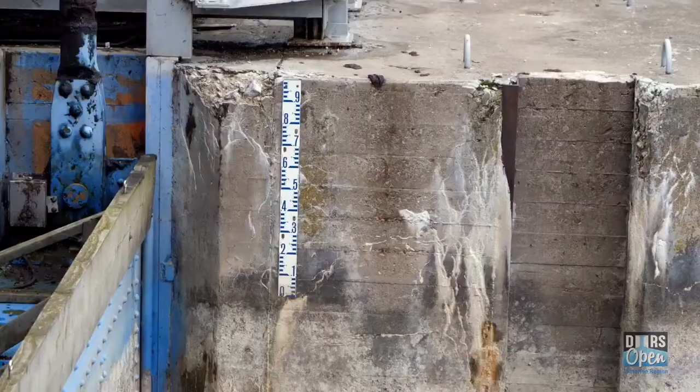This particular dam was the first project of the Grand River Commission. And essentially what a dam does is it holds back water and allows us to release it. So when we have too much water, when we have a flood, or in the spring when we have too much water, the dam can hold that water back. We release some of it in a controlled fashion to try to reduce downstream flooding.

And then over the summer, when it gets really dry like it's been this summer, we can release water to add additional water to the river. Otherwise, the river would be really dry.

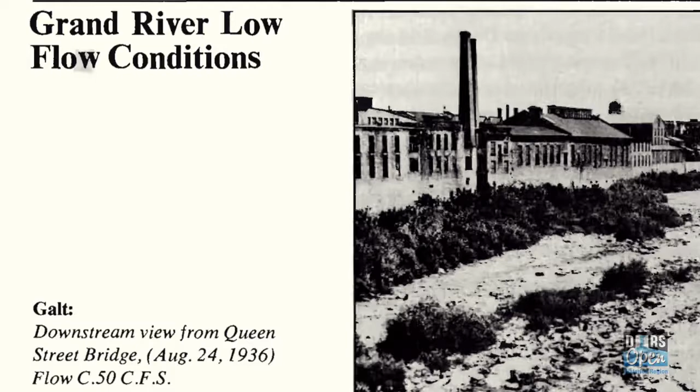The Grand River Conservation Authority really got its start as a result of water problems in Waterloo region, in cities like Cambridge and Kitchener. When the upper portion of the watershed was cleared and converted to agriculture production, a lot of wetlands were drained. It changed the hydrology. And when it changed the hydrology, it started to create floods and droughts. And the water quality got so poor it was making workers sick. That affected industry, it affected the economy.

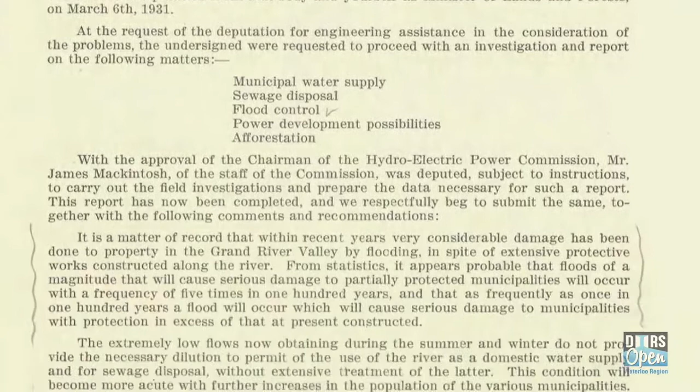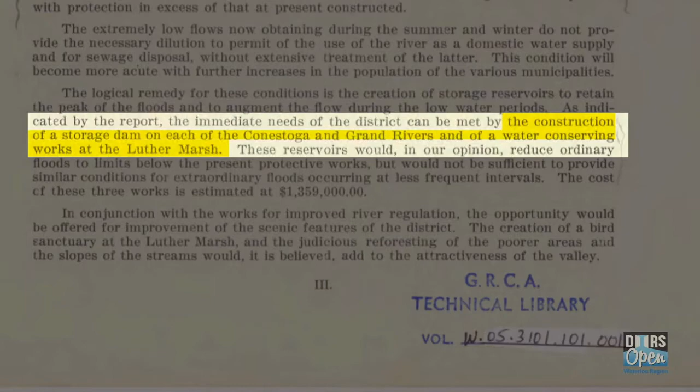The local Economic Board of Trade in Cambridge and Kitchener-Waterloo region went to the provincial government and requested the provincial government commission a study to look into how floods could be reduced and how water quality could be improved. Following that, the Economic Board of Trade recommended that a watershed authority be commissioned or formed to try to solve some of the flooding and water quality problems. And they created what was called the Grand River Commission. The first project of the Grand River Commission is this dam, Shand Dam.

And that's important for water supply, and it's important for helping to dilute treated effluent from the river. Waterloo region has invested a large amount of money in updating the Kitchener-Waterloo sewage treatment plants, and that's improved water quality in the river. The way we see it reflected in the river is not only improved water quality, but a change in species. At one time in downtown Cambridge, people fished carp, now they fish pickerel. That's an incredible change, and the regional tourism around the river has flourished because of the improved water quality.

Waterloo region takes about 25% of their water supply from the river and about 75% from groundwater. Our operating procedure for this dam and downstream is basically to maintain a minimum flow through Waterloo region in the summer of 10 cubic meters per second. 1 cubic meter a second is equivalent to 1,000 liters.

But people have to realize they serve two purposes. They help reduce flooding and they supply water to the river. And those are competing needs, and our reservoir rule curve helps try to find that balance.

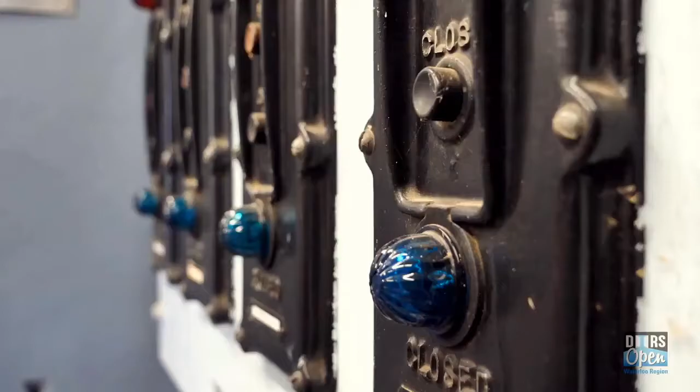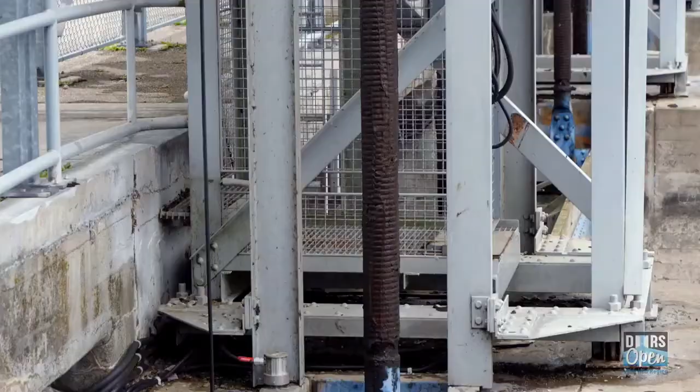So this is electrical equipment that basically provides energy to the gate motors to operate the gates. So on each side of the gate there's large screws, and that's what lifts the gate. So there's a motor up top. It turns gears that basically pull those screws vertically, and that lifts the gate.

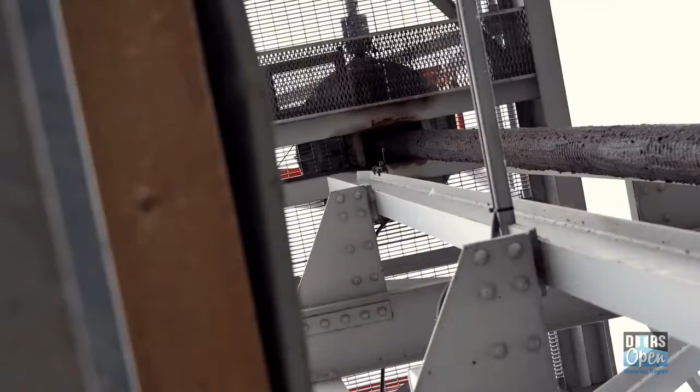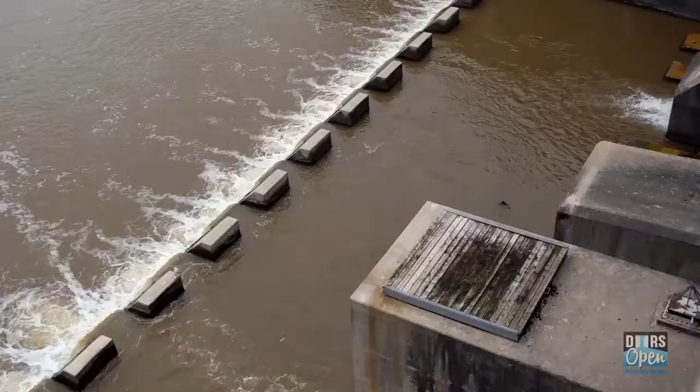So these large blocks and this concrete structure down here is what's called the stilling basin. So when water discharges from the dam, it has a lot of energy. So these blocks tend to slow that water down, and there's a deep pool off the end that allows the water to basically roll but not erode. This is our hydro plant, and we'll be taking you down inside that box structure.

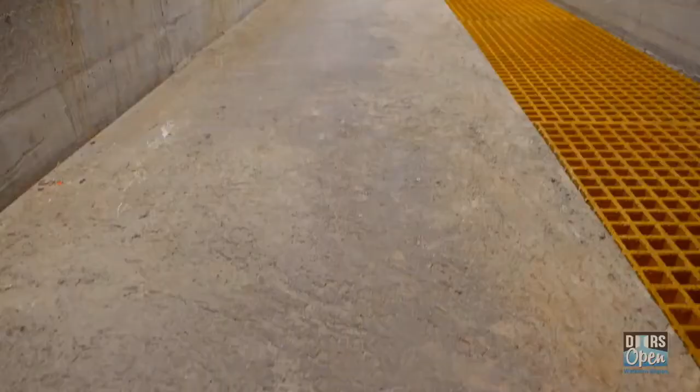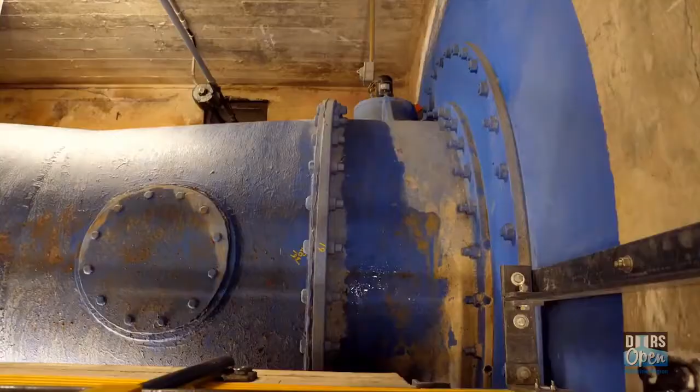So this is one of the 48-inch valves, so it's a low-flow pipe with a big valve on it. You can see the valve operator in the back. And we can actuate the valve or open the valve to let water out through this pipe.

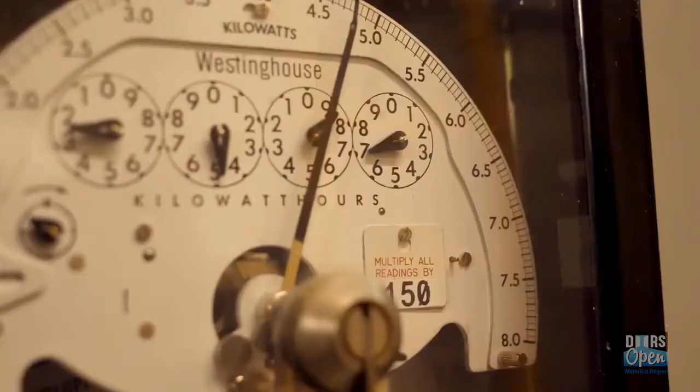We're going to be discharging water anyways, so we put a hydro turbine on it to generate some energy, and it generates some revenue for us. That's the generator. So the turbine turns the generator, that generates electricity and delivers it to the grid. At peak, 690 kilowatts, and that would power several hundred homes.

Do you know the Grand River Conservation Authority manages 27 dams? Important infrastructure is needed for managing our water, and this includes the Grand River that drains into Lake Erie, one of the 5 Great Lakes.

We're now going to join John Johnson, a geologist with the University of Waterloo, to learn all about the Great Lakes. So maybe we can start by first telling us which lakes make up the Great Lakes. There are 5 lakes in the Great Lakes, as shown on this image right here. I've got a few props. This neat shape of Lake Superior, the largest lake, is like this really large container right here. So if we stick this on here, we would put it way up north at the head

of the system. And then we would have 2 other lakes, Lake Michigan and Lake Huron. They go north-south, or Huron's kind of like a hand type shape. And they go below Lake Superior, right here and here. And then we have 2 other lakes. We have Lake Erie and Lake Ontario, which kind of go east-west and are elongated in that way. And they go here and here. So the Great Lakes consist of 5 big lakes: Superior, Huron, Michigan, Erie, and Ontario. Oh, great. Yeah, so now we know which of the lakes make up the 5 Great Lakes.

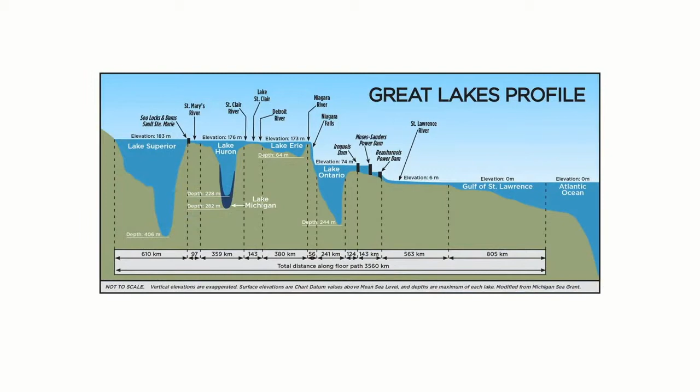So we saw sort of the journey of the water, but how does water make it from Lake Superior to the Atlantic Ocean? Oh, great question. We created another handout for you to follow along in this profile or elevation or stair steps from really high elevation to low elevation. So we're talking Lake Superior is 183 meters above the Atlantic Ocean, which is a relative zero down here. And so if you're up high in Lake Superior, you go through a lock that helps hold up the water or release it and go through the St. Mary's River to Lake Huron.

And Lake Huron and Michigan are drawn as one here. Lake Michigan a little bit deeper and Huron a little shallower, but they're a similar level at 176 meters. So the water level from Superior to Huron and Michigan is 7 meters. In the St. Mary's River, it cascades down to 176 meters. And then the water flows into Lake Erie. And the difference in elevation between Lake Huron and Lake Erie is only 3 meters down the St. Clair and Detroit River. And then from Lake Erie to Lake Ontario, it's a big fall.

Across the Niagara Falls, through the Niagara River, it goes down about 100 meters, down to 74 meters above sea level. And then it takes other steps through a number of locks down to the Atlantic Ocean. So we go from 183 meters all the way down in stair steps, some of which we help to regulate and hold up the water or release the water. Wow, that's a big journey and a big drop from the top of Lake Superior to the Atlantic Ocean.

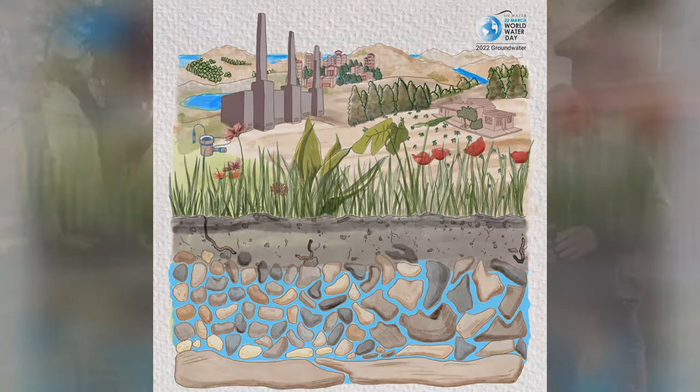It's like when you're at the beach. If you dig a hole beside the shoreline and you start to dig, the hole is empty, has no water in it. But if you dig down deeper, then water comes into it. So the shallow soil, all those sand particles, the spaces are filled with air, and beneath that, they're filled with water.

And a monitoring well is a smaller diameter or smaller width. It's only about 15 millimeters or a centimeter and a half or 2 centimeters in diameter, but we can drill these to all sorts of different depths. The purpose of these wells is to let us measure water levels and collect water samples from different depths. So this next video is a video of Jeremy showing us how we measure water levels in our monitoring wells.

So my name is Jeremy, and today I'm at a quarry. I'm here to conduct some groundwater monitoring, which involves taking water levels and groundwater samples. So beside me here you can see a monitoring well. Now this well is just a white PVC pipe in the ground with a cap on top so that nothing can fall in. This well was constructed before the well regulations were put into place, and so it doesn't have a protective casing around it. Wells that you would see today would need to have a protective casing.

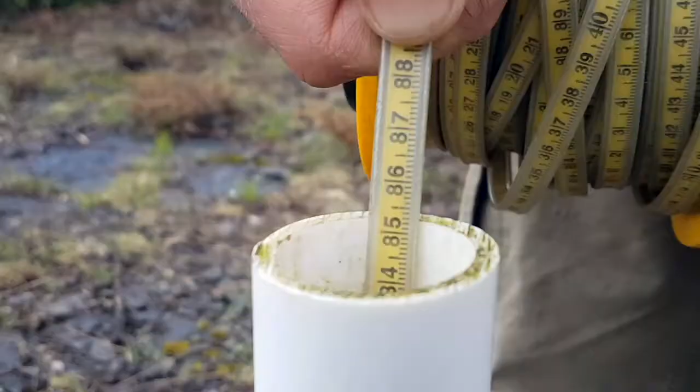So you can see it measures to 88 centimeters on the tape, and now we need to bring the tape up to find the meter mark so we can get an exact value for our water level. So you can see there 3 meters and 88 centimeters, 3.88 meters is our water level in this particular well, and that is measured below the top of the PVC pipe. So always remember to seal the well back up to maintain its integrity, and then record your data in your field book.

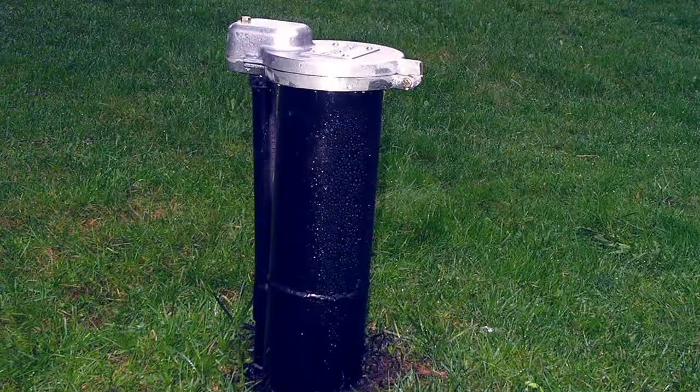So we're here at my farm where I live outside the city, and I have a well. And you can see the well, it has a lid, it has a black steel casing. In this case, this well is about 25 meters deep, and you can see the lid, it's secure so nothing can fall into it. So drilled wells tend to give us better water quality because they're deeper, and the water that we're taking is further away from the ground surface, so we aren't typically going to have some shallow contamination that affects them.

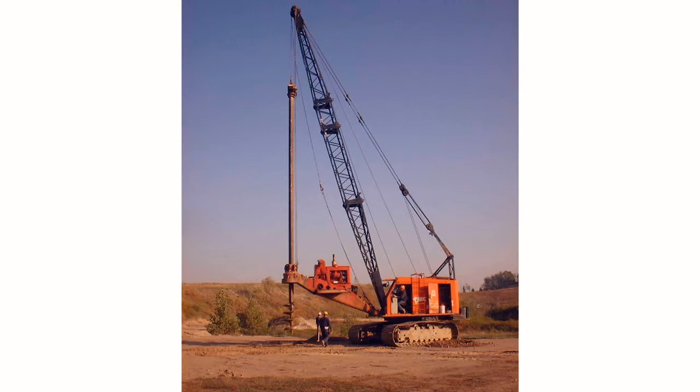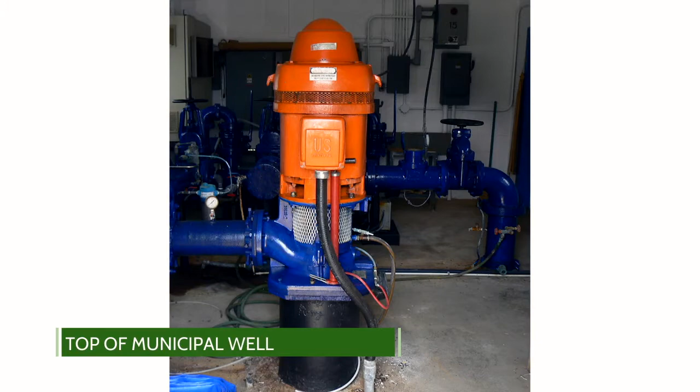So they supply all the water that we need. We have a pump in the bottom of the well that pumps water into the house. Some of our communities rely on drilled wells, like the city of Guelph and the region of Waterloo, and in this case these wells are a larger diameter and deeper than my well, and they produce much higher quantities of water. So while my well might provide 20 liters a minute, these municipal wells can provide 2,000 liters per minute.

So groundwater is something we have to protect. Wells are one of the ways that we take groundwater out of the ground, but they're something that we have to maintain and keep safe so that our water quality is good for us to drink and that we don't take too much water out of the ground.

Thanks for joining me. Now that we all know what groundwater is and how it moves down into the ground, let's explore how it moves through different earth materials. Years ago, all of Waterloo was buried underneath a huge glacier that was hundreds or even thousands of meters deep. It was roughly equivalent to 4 CN towers tall. That is a lot of ice.

Now, these glaciers were dirty. They were full of sand, gravel, and other stuff. And about 12,000 years ago, that ice melted, and as it did, the stuff trapped in the ice, remember the sand, the gravel, and the clay, was all sorted into layers, hundreds of meters thick. This model is very similar to what is below our feet in Waterloo region.

So, here are some of the wells. Here's the river. This would be like the Grand River. Here's the lake. This might be like the lake in Victoria Park. And this is the stuff underground. These are artificial structures that we put there. Now there are several layers in this model. At the surface, this green stuff is meant to represent vegetation. So that would be the plants and the grass, the trees.

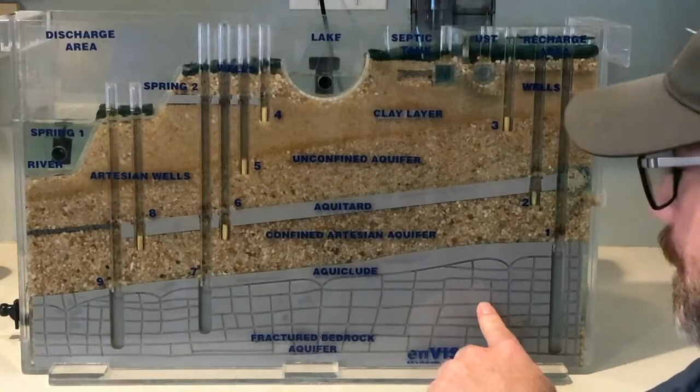And below that layer, there's some coarse gravel, and then some fine sand, and then some coarse sand, and wedged in there are some clay layers. If we were to follow well 1 all the way down, you'd notice that it runs into something, and this is meant to represent the bedrock. In Waterloo Region, the bedrock is dolostone and limestone, and it's highly fractured, and these lines represent those fractures.

In some places, like Elora Gorge, the bedrock is near the surface, and you might see this if you went for a walk in that area. But in other places, it is hundreds of meters underground. This is a core of the bedrock from Waterloo, and you can see here that there are fractures, and in these fractures, this is where the water is held and where it would flow. This is what makes it an aquifer.

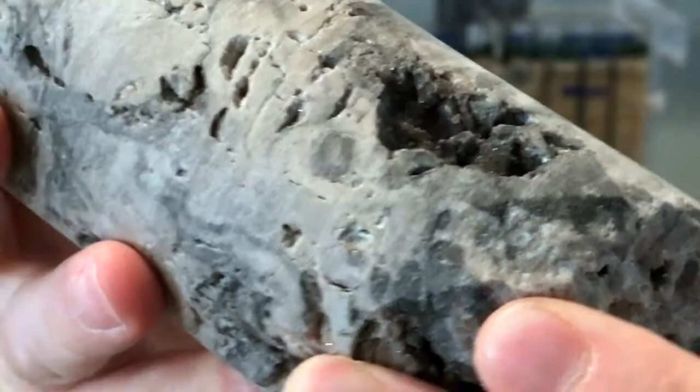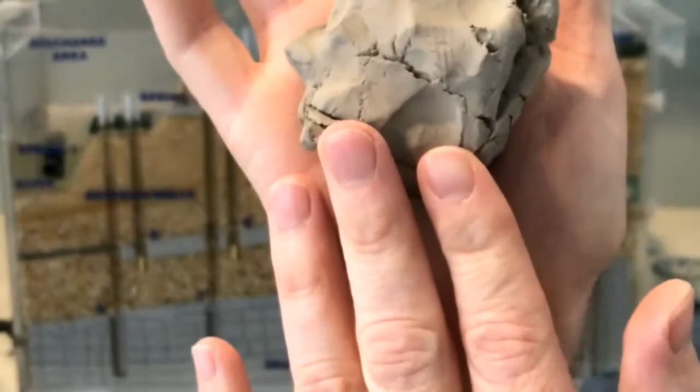Of course, sand and gravel also hold water and allow it to flow, so these are also aquifers. Some material, like clay, is exceptionally slow at letting water flow through it, and so we would call that an aquitard. It's slowing the flow of water. All right, so now we get to do the fun part. We're going to show you how water flows through this system, and to do that we're going to use dye.

I'm going to invite my assistant over, and she's going to actually apply the dye. So everybody, this is Alba, and we're going to give her the syringe. Here's our blue dye, and you're actually going to squeeze it and suck some blue dye in, and she's going to add a little bit to each one of the wells, these first ones here. Go for it. Yeah.

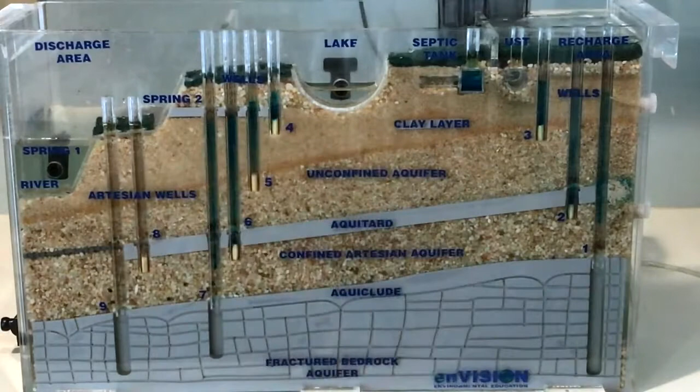The height of the water underground is what we call the water table. So in here, you can see, because Alba's added blue dye to all these different wells, we can now see where the water table is. I'm going to use this red pen, and I'm going to connect the river to the depth of the well, the water in the wells, to the lake, and we'll see visually where the water table exists.

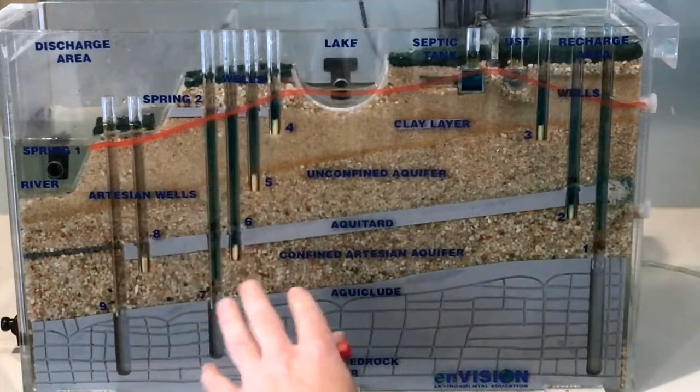And what you notice is that it's not a flat line, that it follows topography to some extent. The depth of water underground changes depending on where you are. That's pretty important if you're a farmer or if you live in the country and you need to get your water from underground. You want to know how deep the water is, so you know how deep you're going to drill. The height of the water underground also changes with time and with precipitation. And at the top here we've got a pump that's pushing water through our system, and it's over here on the right in our area of recharge.

This is where the water, when it's raining or when the snow melts, water enters the ground. So right now it's raining. If I move the pump over, it stopped raining. And you should see in a second, the blue is going to start dropping in each one of these wells. So as the rain decreases, the amount of water entering the system decreases, and the amount of water underground decreases. So here you can see it's well below that red line. And it's going to keep dropping the longer we leave it off.

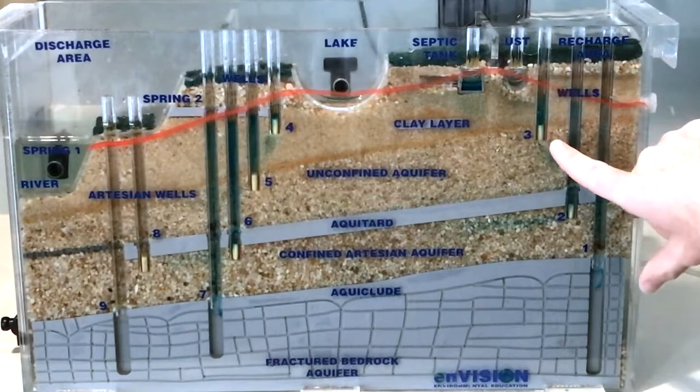Of course, it'll eventually rain again, so let's bring this back. And wow, look how fast that is. There's a good rain event, a nice thunderstorm. The ground is going to quickly recharge. One of the other things that I thought we should explore with this model is how the water enters the system over here, but it exits over here in the river. So this water is flowing from one side to the other.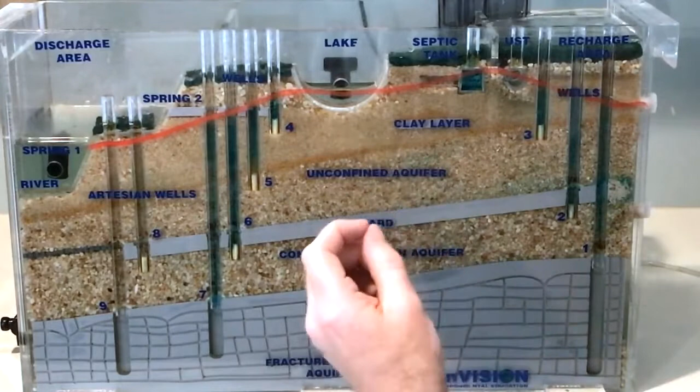Now, we've got several different layers, several different aquifers. The water is going to flow through them at different speeds because of the pore spaces, because of the size of the material. So the gravel, it's a pretty big material, and that means the spaces between those materials are quite large as well. So in theory, if the spaces are larger, the water is going to flow faster through that. Up here in the sand layer, the particles are smaller, so there's smaller spaces between the particles. That means water can't flow quite as fast through it.

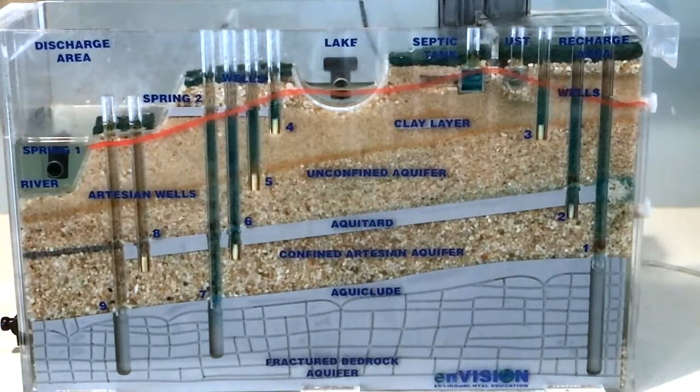So if I was to guess which of these 4 layers the water is going to flow the fastest, I would guess that the fractured bedrock is going to be the fastest because the pore spaces are the largest. And this fine sand layer at the top is going to be the slowest because the particles are so much smaller. There are other layers like this clay layer. They're going to act in a different way, but we'll come back to that in a minute. So I'm going to add a little bit more dye, and then we're going to flush it. We're going to see which one flows the fastest.

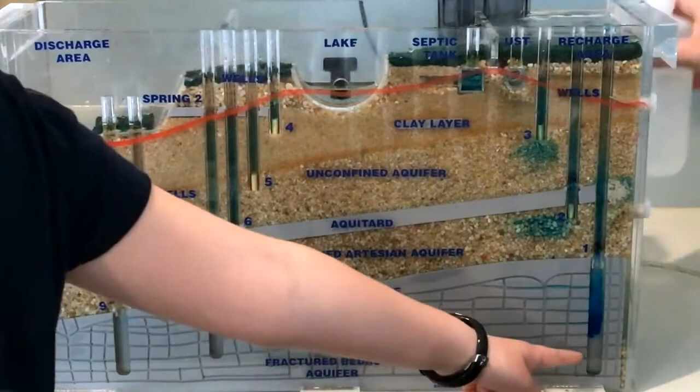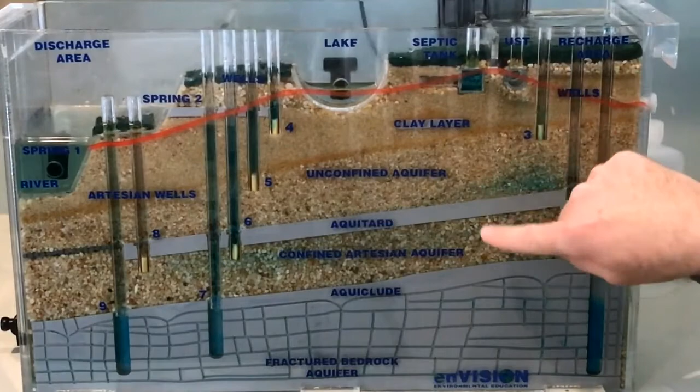Now remember, our theory is that the water's going to flow really fast in this one. And look, follow Alba's finger. It's already flowed almost all the way to the other side. Number 2, it's only about halfway. And in number 3, it's only moved a little bit, maybe 2 centimeters. So the size of the material is really important for how quickly the water flows. Fractured bedrock is the fastest, fine sand is the slowest, and the cobble and gravel and coarse sand are in the middle. Well, I hope you enjoyed this amazing aquifer and learned about how water flows through different materials.

Bye, everyone. In Waterloo Region, some of the drinking water starts at the Grand River. Now, come with me on a tour of the Mannheim Water Treatment Plant to find out what's involved in treating water from the Grand River. And then we'll learn why water towers are an important part of the distribution system. And finally, we'll also find out about the many ways we test water.

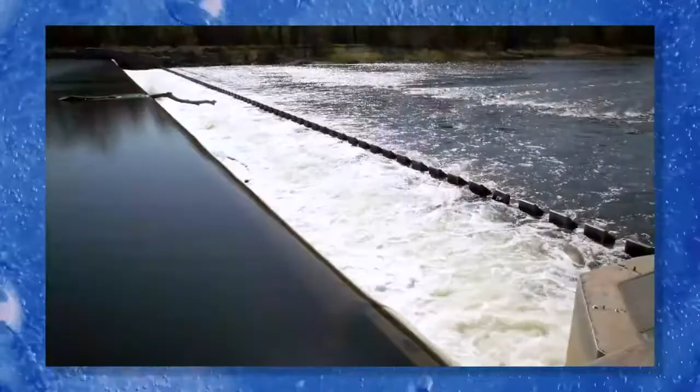Waterloo Region depends on the Grand River for 20 to 25% of its drinking water. Treating water from the Grand River takes more work and energy than treating groundwater. Water in a river is exposed to human and animal activity, plus the effects of weather. The journey begins at the Grand River in the Hidden Valley area near the Highway 8 bridge between Kitchener and Cambridge. A weir redirects the water into a low lift. Inside this building are screens that keep out large debris and branches. The water then moves through a pipe to a large reservoir with 4 storage tanks. The reservoir can hold 142 million liters of water, enough to fill 2,800 backyard swimming pools.

The reservoir serves 2 purposes. First, it gives time for sand and dirt to settle out of the water. The reservoir also builds in a safety delay. If the Region of Waterloo learns of contamination in the Grand River, say a chemical spill from an accident, the reservoir provides several days of water while the river is cleaned up. After the water leaves the reservoir, a pump helps to move it 10 kilometers uphill through a large underground pipe to the water treatment plant in Mannheim.

The treatment plant is on one of the highest elevation points in Waterloo Region. Being up so high allows the use of gravity to help water flow downhill through the treatment plant. Using less energy reduces costs and greenhouse gases associated with climate change. The treatment plant can treat up to 840 liters of water every second, but normally it produces between 400 and 600 liters per second, about 40 to 50 million liters of water every day. The water first enters one of 2 raw water tanks before entering the plant to begin the treatment process. Each tank can supply the plant with about 60 minutes of water.

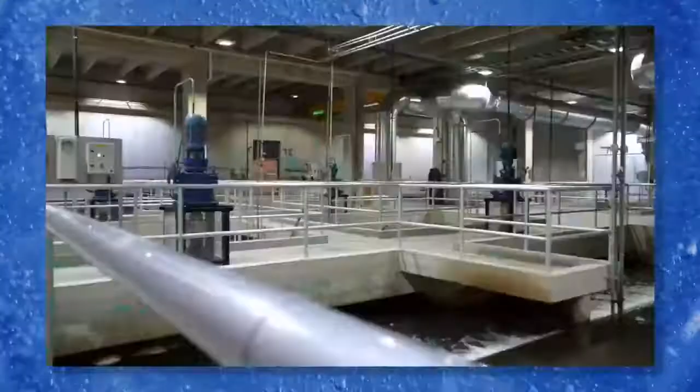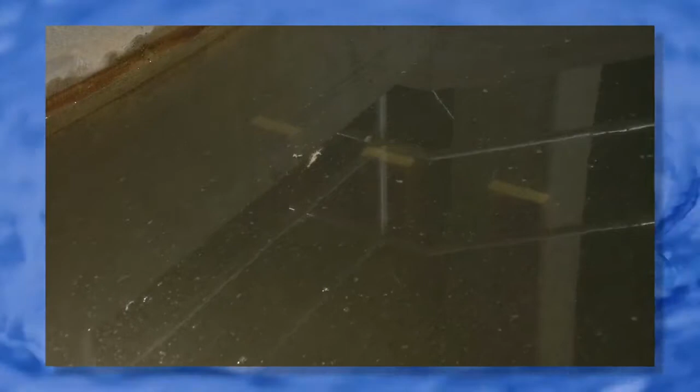Inside the plant, the water completes a multi-step treatment process. Step 1 combines 2 steps, coagulation and flocculation. A polymer is added to the water that helps tiny particles such as sand or algae stick together and form large clumps called flocs. Look closely and you might be able to see the spinning wheel slowly moving at the bottom of the tank. The spinning wheel helps to mix the polymer with the water.

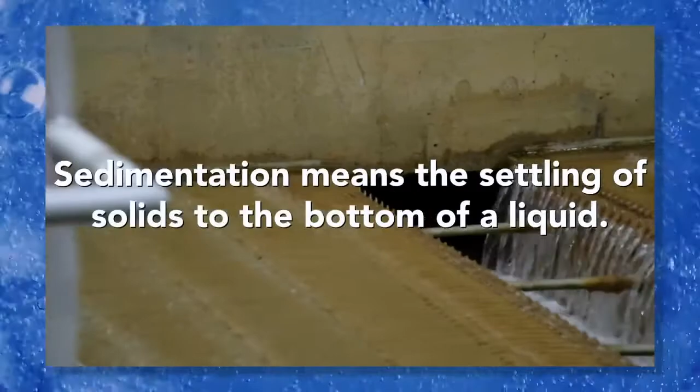Step 2 is sedimentation. Water flows through the plate settler from the bottom up. The plate provides a surface area for the flocs or clumps of dirt to fall onto and slide down to the bottom of the tank. The flocs are then pumped outside to be dried and treated.

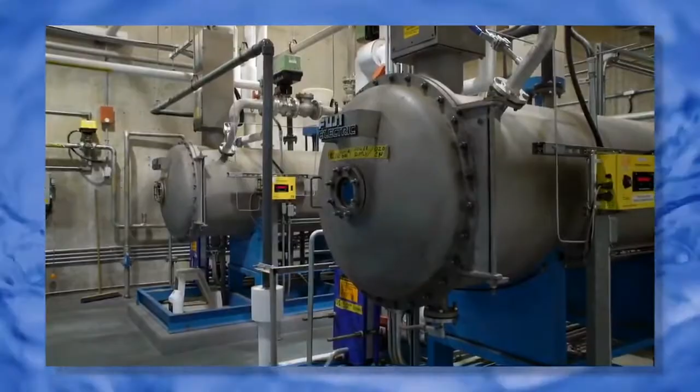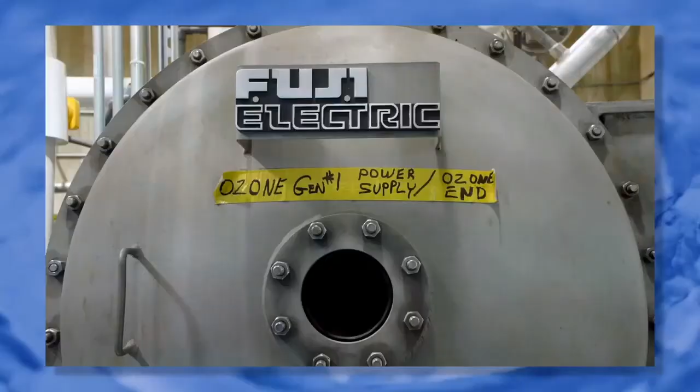Step 3 is ozonation. Ozone gas disinfects the water by deactivating bacteria and viruses, as well as improving the taste, smell, and color of the water. Ozone gas is produced at the treatment plant from liquid oxygen. After the ozone gas has done its job in the water, the ozone gas molecules change back to normal oxygen.

Step 4 is filtration. The water moves through layers of sand and activated carbon to remove any remaining silt, viruses, bacteria, or other impurities. Filtration also helps to remove cloudiness from the water and make it clear, important for the next step.

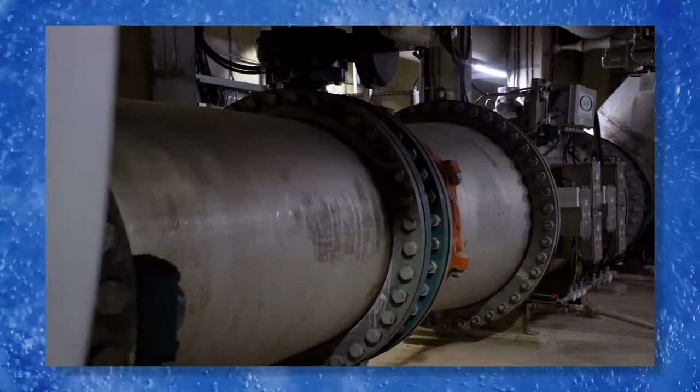Step 5 is disinfection using ultraviolet radiation. The water flows through a large pipe with special lamps that shine ultraviolet or UV rays through the clear water. This instantly deactivates all sorts of pathogens such as viruses, bacteria, and other microorganisms that can make people sick.

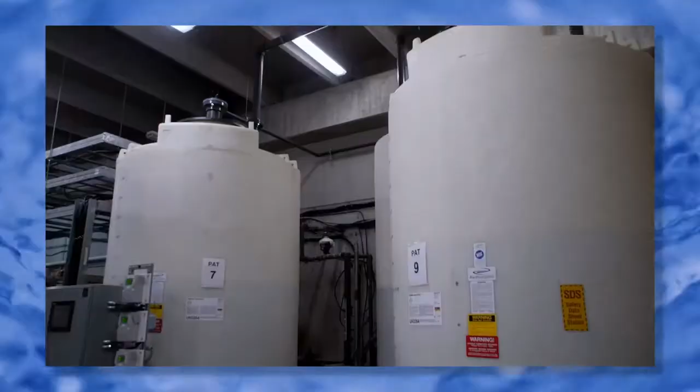Step 6 is disinfection using chlorination. Small amounts of chlorine added to the water disinfect it for viruses and bacteria. Chlorine doesn't kill every type of microorganism, which is why UV radiation is included as the previous step. And unlike UV radiation, a bit of residual chlorine stays in the water to keep it clean as it travels through underground pipes to your home.

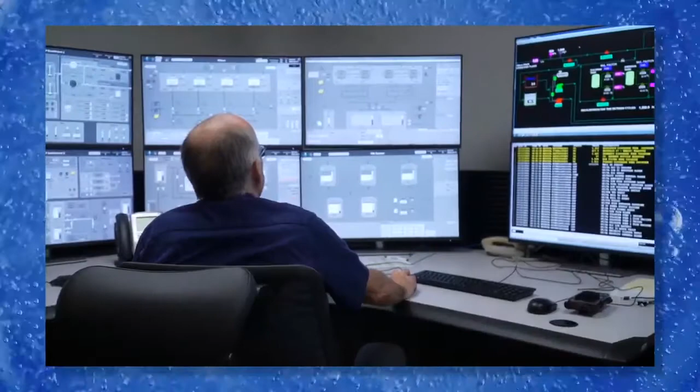Each step is carefully monitored 24 hours a day, 7 days a week from a high-tech control room. Water operators can track what is happening throughout the plant and start or stop the system. The plant has 2 separate treatment processes. If any process is shut down, the other side of the plant can keep operating.

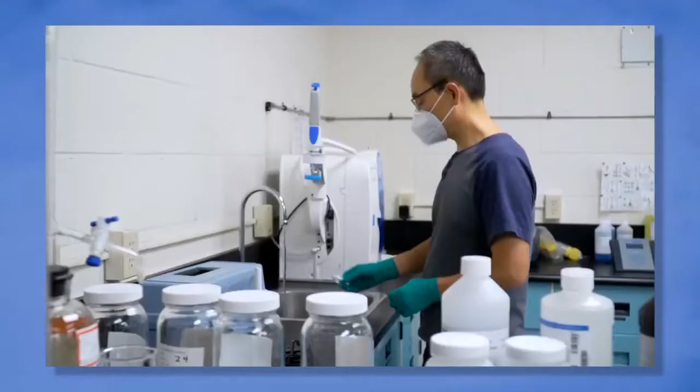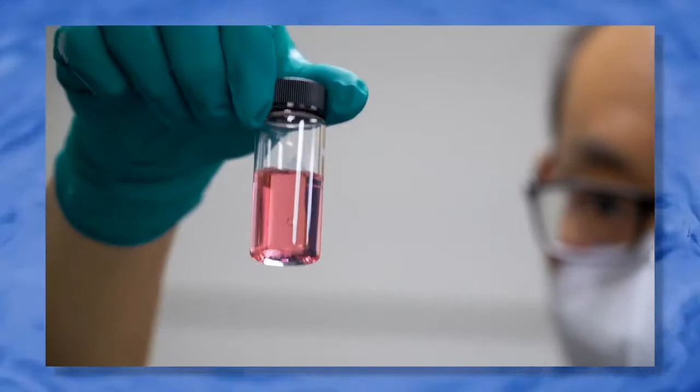Testing the water is an important part of the treatment process to make sure the water is clean and safe to drink. The water is tested before, during, and after treatment. Ontario has a Safe Drinking Water Act, which sets the legal safety standards for municipalities. These rules are strict and require regular testing of drinking water.

It takes about 8 hours from the time the water enters the treatment plant until it leaves as clean drinking water. After the water leaves the Mannheim Water Treatment Plant, it is mixed with groundwater from nearby wells before entering the distribution system that delivers water to homes in Waterloo Region.

Hello everybody. So in this presentation we will be talking about water towers and the water distribution system. Before discussing the water distribution system, it's important to understand where the water you drink and bathe in comes from. So your drinking water in Guelph is 100% groundwater, and in the region of Waterloo, 80% is groundwater and 20% is from the Grand River.

Groundwater is the rain and melted snow that soaks into the ground. Groundwater fills in the tiny spaces between sand grains, gravel, or rock that make up layers in the aquifer. Groundwater wells throughout the regions collect the groundwater. In the region of Waterloo, over 120 wells supply 120 million liters of drinking water each day. A pump is used to extract the water, which is then tested and treated before it enters our pipe network.

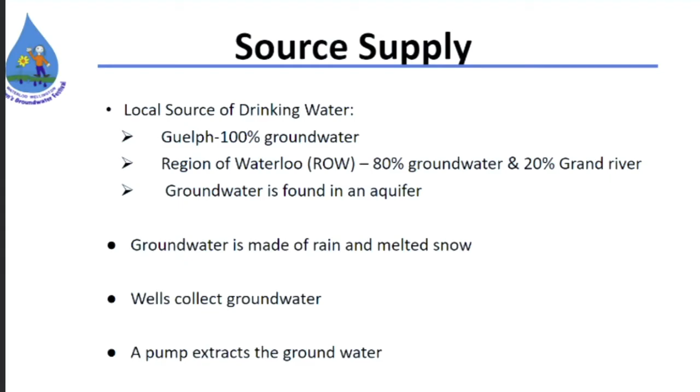Our pipe system plays a great role within the distribution system. Another main component of the distribution system is our water towers. Our water towers pressurize water. So by elevating the water, they ensure that the water is being pressured, which is driven by gravity, and this forces the water down and throughout the system.

Pressure is a way of measuring how much force is acting over an area. Fluids can exert pressure too. So imagine being submerged in water. The water above you would be pushing down on you because of the force of gravity, and would therefore be exerting pressure on you. If you go deeper, there will be more water above you, and the weight and pressure from the water would therefore be greater. So the height of the water tower is what provides the pressure for the water within it and in the distribution system.

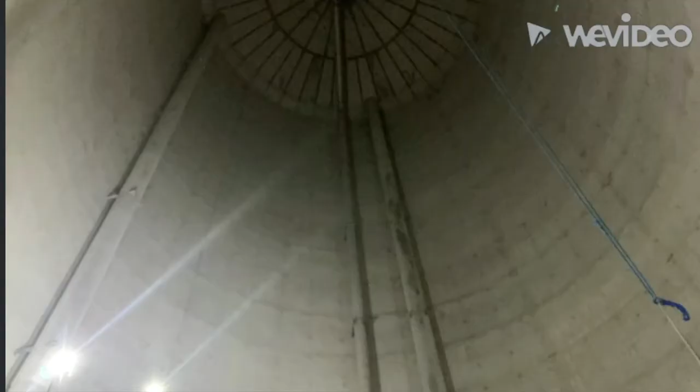Hello, what's your name? My name is Martin. Martin? Yep. Hey Martin,

So what do you do here at the water tower? I work with the Regional Water Department. My job here is to make sure that the water's safe, so I'm in compliance. My job is to make sure that what we're doing is in compliance with the region and the ministry's regulations. So make sure water's safe, no bacteria in the water. We take samples and test the water. Okay, so make sure everything's just running as it should be, based off what we've been told. Yep, by the government of Ontario.

Perfect. So what is the water tower's main purpose? So the water tower's main purpose in the region of Waterloo is to maintain pressure in the distribution system. We generally fill the tower at night when there's no demand, and then when the tower is full, it is good for the day to supply demand, the pressure in the system. So when you say maintain pressure in the system, why do you need pressure in the system?

So when you turn your tap on, if you want to see water coming out with good flow, that's pressure in the system. If, when you get a shower, you're at say a campsite and you have that drip, that's when you have no pressure. So we want to maintain that pressure always the same. So towers are built high in high areas. We pump them full of water, and then when there's high demand for using water, the pressure's down, and the water moves out. So that gives you pressure in the system.

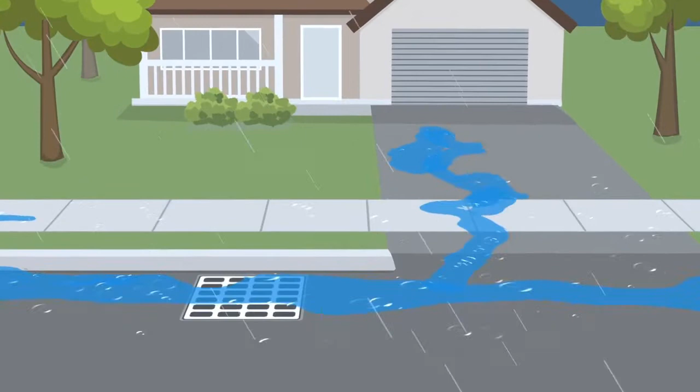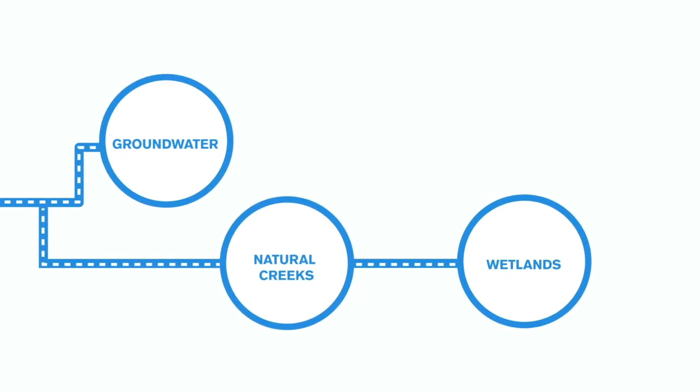Hard surfaces like rooftops, driveways, and roadways prevent rain and melted snow from making its way into the ground. Our stormwater system collects and transports this water through a series of drains, catch basins, and underground pipes. Stormwater is absorbed into our groundwater or natural creeks and wetlands before making its way into the Grand River. Our drinking water system draws water from these same sources. 80% of our drinking water comes from under the ground. The other 20% is surface water from the Grand River.

This water goes through a complex treatment and testing process before it travels through water mains and out of your tap. Once tap water is used for our showers, washing machines, and toilets, it becomes sewage and wastewater.

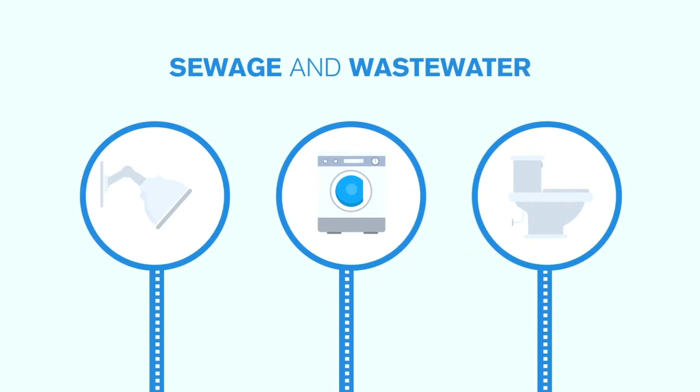It goes down the drains and travels through a large network of sewer lines and pumping systems to a number of regional treatment plants, where it is carefully treated before being released to the Grand River. Investments and maintenance in our water infrastructure today help to keep our water safe, groundwater and surface water resources secure, and protect our properties from flooding.

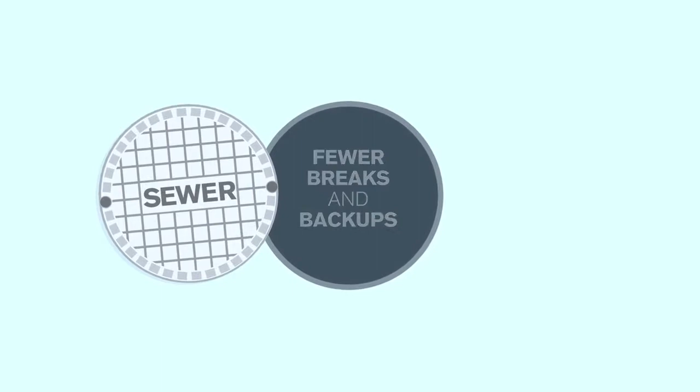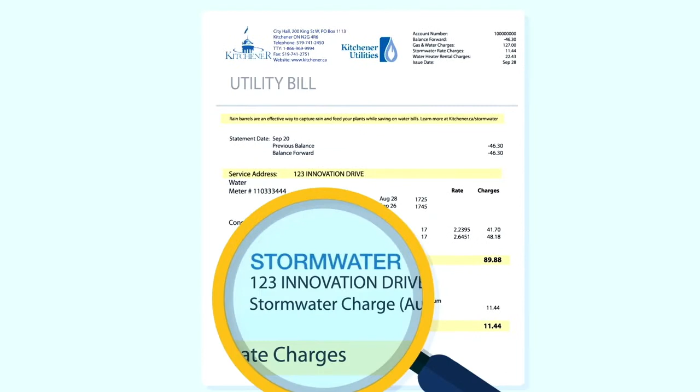Our stormwater and sanitary sewers experience fewer breaks and backups, and we see lower operating and maintenance costs over time. Most importantly, we get to enjoy clean, reliable water for drinking, cooking, and playing. Now you know, stormwater, sewer, and drinking water systems working together to keep our city working.

Hi, I'm Kyle, and I'm an environmental scientist, and I'm here today to talk to you about why we sample water. So we're going to talk about 4 different types of water today. We're going to talk about tap water, groundwater, wastewater, and stormwater.

So first we're going to talk about stormwater, and behind me today is a stormwater pond. This stormwater pond is used to partially treat pollutants that come off our roads and parking lots, like salt and bacteria and even dirt. So some of the sampling that we do with stormwater ponds is to make sure that the pond is working as designed or as engineered.

And we take samples usually in big long bottles, and take samples usually as the water's coming in and as the water's going out of the pond to make sure that the pond's working properly.

So the one thing with stormwater ponds that you must remember is that even though they look like ponds that might be fun for skating or for swimming, they're not. They can actually be very dangerous, so you need to make sure that you stay away from them. And there's usually signs like this posted to tell you to keep off.

Hi, now we're going to talk about groundwater and why we sample groundwater. First, we're going to talk a little bit about how we sample groundwater. So inside these blue metal pipes are monitoring wells, so they're groundwater wells, and these wells go deep into the ground beneath us, and groundwater is of course the water that's underneath us in the soil and rocks. So how deep do these wells go? Well, some of these wells can be as deep as a telephone pole is high, and some can even be as deep as the water tower is high.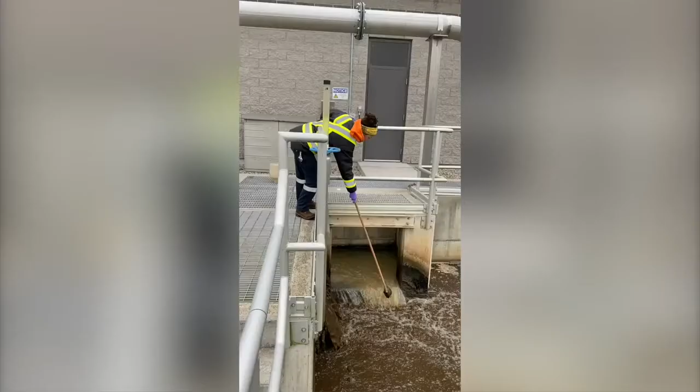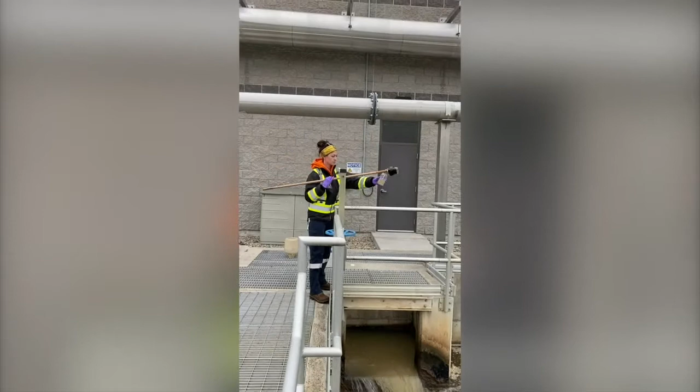All right, now we're going to talk about wastewater sampling. So what is wastewater? First of all, wastewater or sewage is the water that comes from your sink or from your toilet, and it goes down into pipes under the ground and ends up at the wastewater treatment plant. And this is a wastewater treatment plant in Elora in the township of Centre Wellington, and Grace is an operator at this plant, and she is going to show us how she samples every day. So this first video is Grace taking a sample of the wastewater as it comes into the plant.

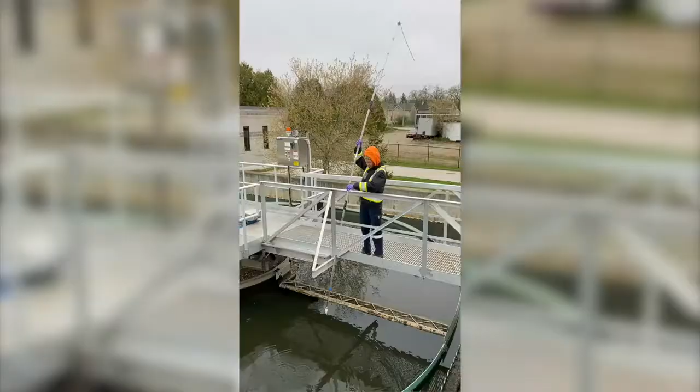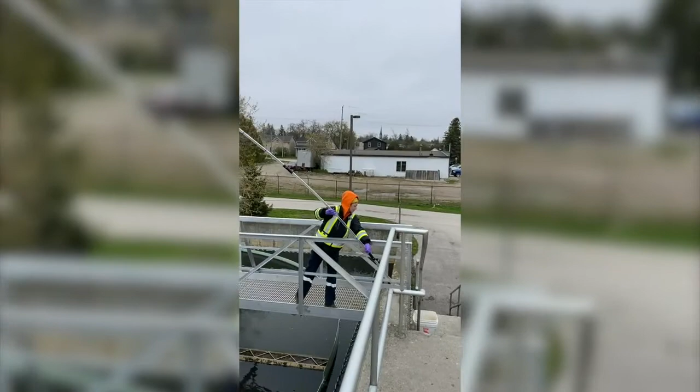Now we're taking a look at the bubbles in the aeration tank, and wastewater plants have lots of different pieces of equipment to clean the water, and this is one of them. Grace is now grabbing a sample with the sludge judge from another piece of the treatment process called the secondary clarifier, and she uses this to get a sample at the very bottom of the clarifier, and then she transfers that into the bucket. And they use this to test the treatment process. And the secondary clarifier gives the solids in the water a chance to settle out before it goes to a polishing step, which is called the sand filters.

And now we're going to watch Grace take a final effluent sample after the sand filters. So there it is right there. And you can see how clean and clear that water is. Grace is now in the laboratory. And Grace is looking into the microscope to look at the microorganisms that live in the aeration tank. And these microorganisms help treat ammonia, which is poisonous to aquatic life.

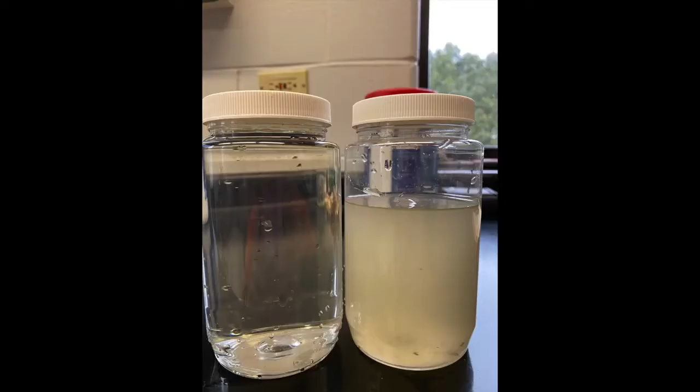And finally, we have a picture of the first sample that Grace took when the wastewater first came into the plant, and that's on the right-hand side. And a picture of the final effluent after it's been treated and just before it gets discharged into the Grand River when it leaves the plant. And you can see the difference between the two samples. That's why it's so important to ensure that all of the solids and toxins are removed from the water before we discharge it to the river.

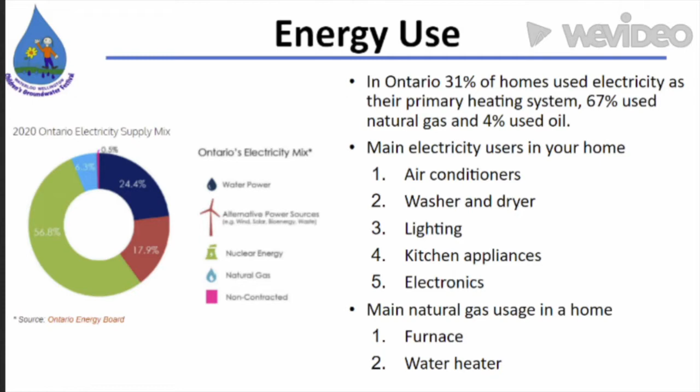Some other ways in which our energy is created in Ontario is through wind energy, solar energy, as well as through water power. When talking about water and where we get it from, in the Waterloo region, 80% of us, and within the Wellington region, 100% of us receive our water from groundwater. And within our homes, we use this water in our toilets, our showers and baths, for our laundry machines, and for food.

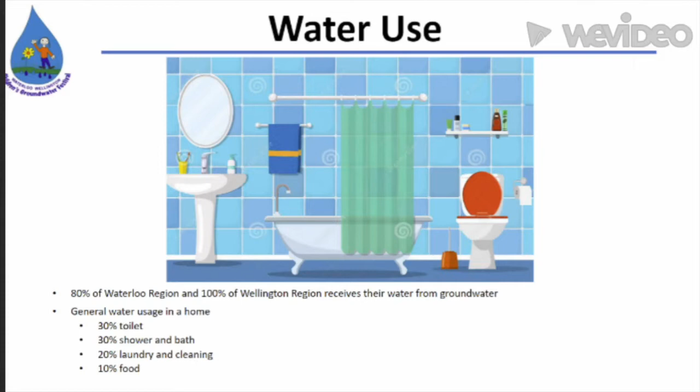Now let's talk about energy conservation. Conserving energy, firstly, is a great way of reducing our greenhouse gas emissions, and it also helps lower our energy bill and the amount of money that we use to pay for our energy. Within our house, there are many different appliances which use energy, and there are many ways in which they overly use energy and ways in which we can reduce them. So I'm going to talk over some main ones now.

Firstly, we have our central air conditioner. In the hottest times of the year, our central air conditioner can account for up to 1/3 of Ontario's electricity demand. To avoid using excessive energy from your central air conditioner, you can keep your doors and windows closed when it's on, keep your blinds and curtains closed during hot days, and use a ceiling fan.

Our fridges and freezers, especially the older ones, can cost over $10 a month in electricity to use. To lower these costs, keep the temperature in your fridge between 2 and 5 degrees Celsius. The temperature of your freezer should be about negative 18 degrees Celsius. Also, don't overload your fridge or freezer. These appliances work best when they're filled properly.

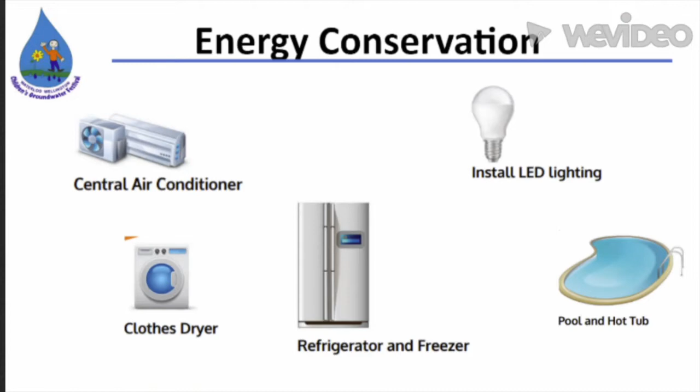Don't fill it excessively. For a pool and hot tub, the pumps are among the highest energy consumers in our homes, if we have one. To lower their energy, make sure to cover your pool when it's not being used. And finally, make sure you install LED lights. LED lights can save 80% or more compared to incandescent lights, and they last 3 times as long.

Quickly, I'm going to speak about phantom power. Phantom power is simply power that is being used by a device when it is not actually being used by the owner. For example, energy being used by lights when we are not in that room. This phantom power actually accounts for 10% of our home's energy use. To avoid it, make sure that you are shutting off your devices such as your televisions, your phone chargers, your computers, and your lights when they're not in use.

When it comes to reducing your natural gas usage, you should do the following. Lower your home's temperature by 2 or 3 degrees. Set your thermostat to 20 degrees when you're awake and 17 degrees when you're sleeping or not at home. Clean or change your furnace filter regularly. Keep air vents and baseboards dust-free and unobstructed. Let the sun heat your home.

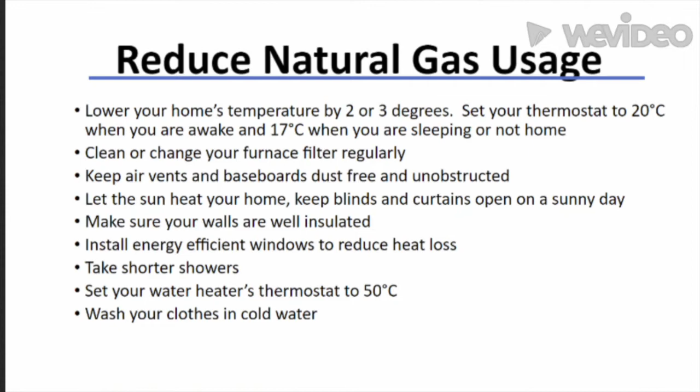Keep blinds and curtains open on sunny days. Make sure your walls are well insulated. Install energy-efficient windows to reduce heat loss. Take shorter showers. Set your water heater's thermostat to 50 degrees and wash your clothes in cold water.

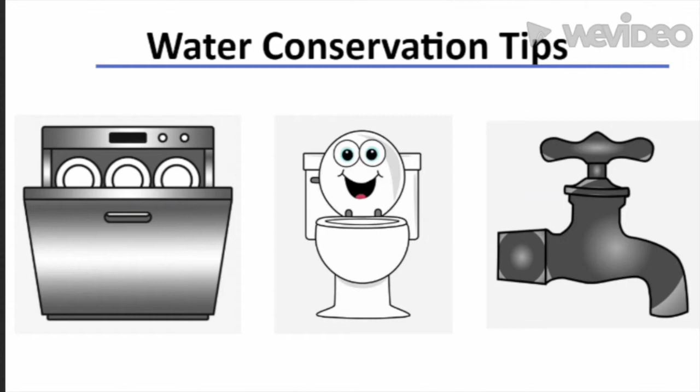In terms of conserving water, make sure to turn off the tap when you brush. Check for drips and leaks from your toilets and taps. And use your dishwasher instead of washing the dishes by hand. We are really fortunate to have clean drinking water. Not everyone is this fortunate. So let's find out about how other countries deal with the lack of clean drinking water.

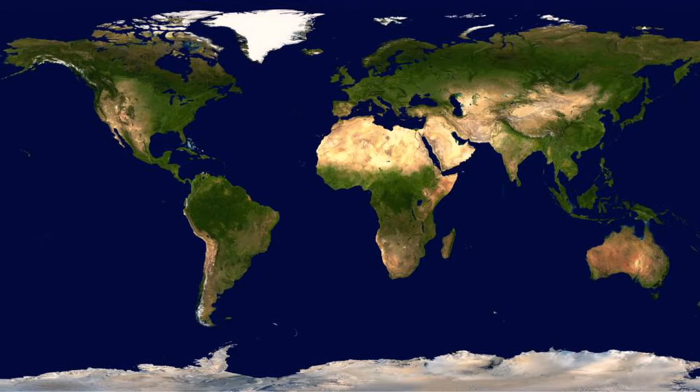Have you ever thought about how water affects your life? Water is crucial to us, but not everyone has access to clean, safe, running water.

Now, I would like to take you on a journey to visit Aguascalientes, a city located in the arid region of central Mexico. The area was famous for its hot springs. That is how it got its name, which means hot waters in English. The dry climate and the overuse have changed that.

Unlike Ontario, Aguascalientes only has 2 seasons, dry and wet season. All the rain is concentrated in a few months from May to August. The difference is obvious when you look at the vegetation. Plants and animals here have adapted to live in very dry conditions. Plants have deep roots to get as much water as they can.

This is one of my favorite plants. It is called huizache. It has tiny leaves that help to prevent evapotranspiration and big thorns so local herbivores don't eat their leaves. Having deep roots is not always enough.

Other local plants, like yuccas, cacti, and other succulents, have wax covering their leaves to prevent water loss and are capable of storing water inside their tissues. Humans can't save water inside their bodies like plants. During dry season, local rivers and streams don't have running water. There are water dams in the city that help store some of that water.

Most of the water used in Aguascalientes homes is groundwater and comes from deep wells. There are big tanks and water towers that store treated water across the city. But it is not enough. All houses have water tanks in their roofs or cisterns to help them collect water.

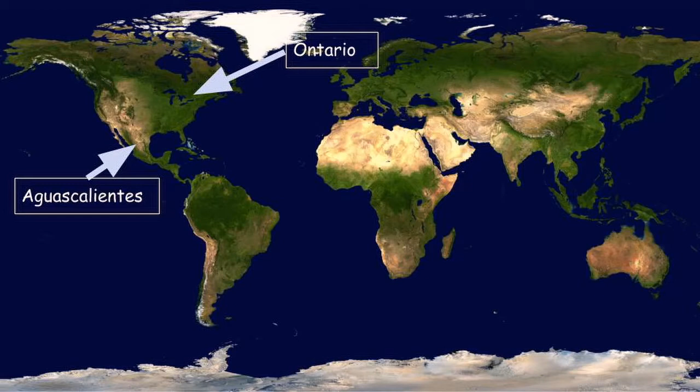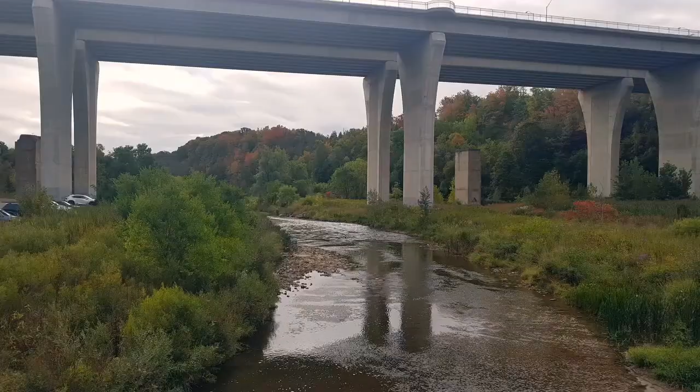The situation in Ontario is very different. Let's take a look together. The animals, plants, and other living organisms are adapted to go through 4 seasons each year. Spring, when the snow melts, temperature rises, and flowers like trilliums bloom. Hot and dry summers, followed by fall, when leaves change color and then fall. And then winter, with cold temperatures and snow. In Ontario, you can see water in different forms all year round.

We asked some Ontario kids about water. Let's hear what they have to say. What do you use water for? Drinking. I use water by drinking it. I use it by going to the washroom. I use it by washing dishes. I use it to brush my teeth. I use it to get my hair wet. I use it to shower and bathe.

How long have you gone without water? I've probably gone like 3 or 4 hours without water while I've been awake. 2 hours. How much water do you think you use every day? 1 liter. 6, but if I have a shower, 8.

What are ways that you can say that you try to conserve water? Making sure my sister doesn't turn it on to brush her teeth and then leave it there, which she does a lot. I don't leave the tap on while brushing my teeth. If you're done drinking water and you don't finish it, you could put it back in the container so you can save it instead of dumping it down the drain. Can you think of other ways to save water?